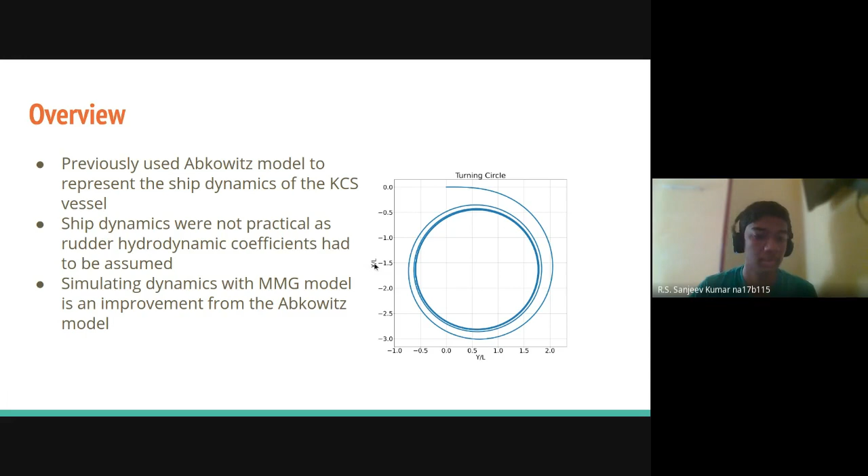So first, for any RL problem, you have the environment, the state, and the action. Here our environment is how we are simulating the ship dynamics. Previously we were using the Abkowitz 3 degree of freedom model for the KCS vessel, and the problem with that was we were missing the rudder hydrodynamic coefficients. So as you can see, this turning circle is not converging at all, so it was not very practical. We discarded this one, and now I'm using the MMG model as the simulation engine for the RL problem. So now I'll talk about how I'm modeling the mathematics using the MMG model.

Okay, so this is the kinematics. These are the global fixed axis, capital X and capital Y. Small x, small y are the body fixed coordinates, and beta is the drift angle. The heading angle is always measured from the positive x-axis in the global fixed frame, and the rudder towards the port side is taken positive. Since the z-axis is downwards, the yaw will be positive clockwise.

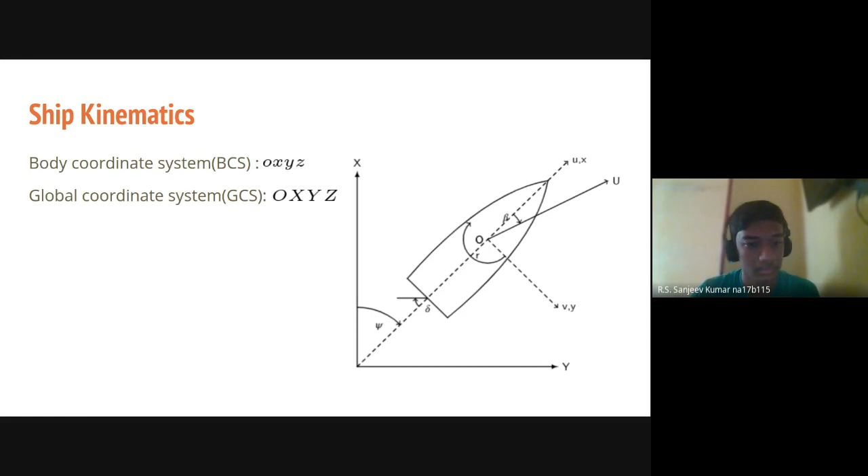Now I'll go through the equations of motion using the MMG model. Here the X, Y, and N are the total forces - this is the total surge force, the sway force, and N is the total yaw moment. These are taken from the midship reference, and in these equations u, v, and r, the velocities are measured from the center of gravity.

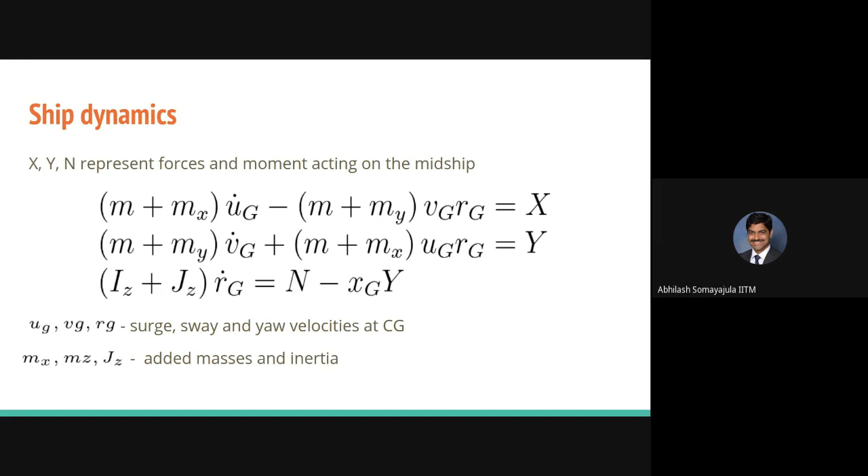Here, X, Y, and N are measured somewhere else. Sir, come again - capital X, capital Y, and capital N, they are measured at a different point. Yeah, they are measured from the midship. From the midship, all right. Here, My, Mx, and Jz are the added masses and inertia.

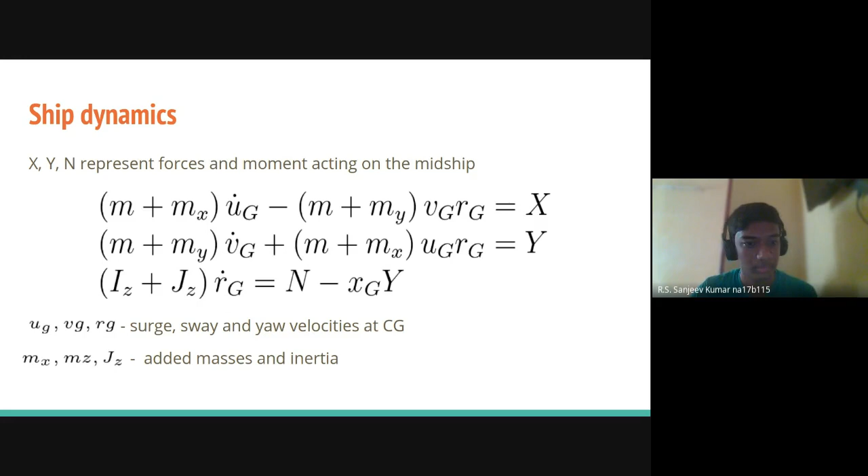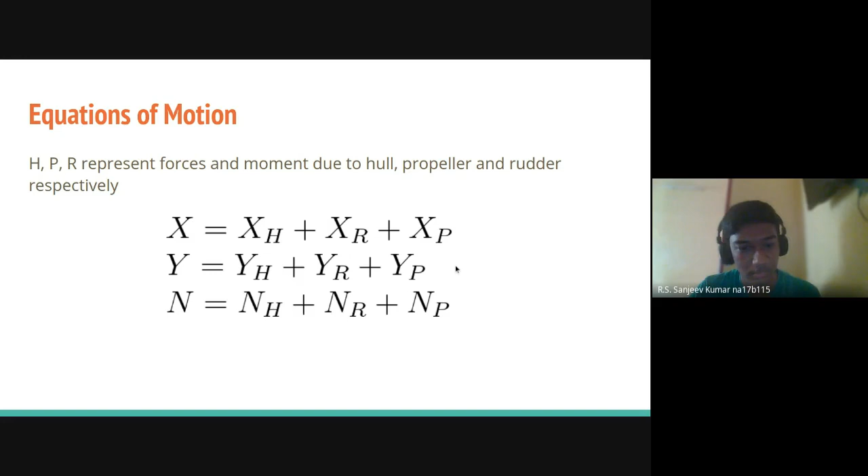This is how the total forces and moment about the midship are calculated. It has the forces due to the hull, the rudder, and the propeller. So this is how the forces due to the hull are modeled in the MMG model. Usually in the Abkowitz model, we'll have hydrodynamic coefficients with respect to the surge and sway velocities, but it is different here in the MMG model - the hydrodynamic coefficients are measured with respect to the drift angle beta and the yaw rate r. So in general, the MMG model captures the non-linearities much more clearly than the Abkowitz model.

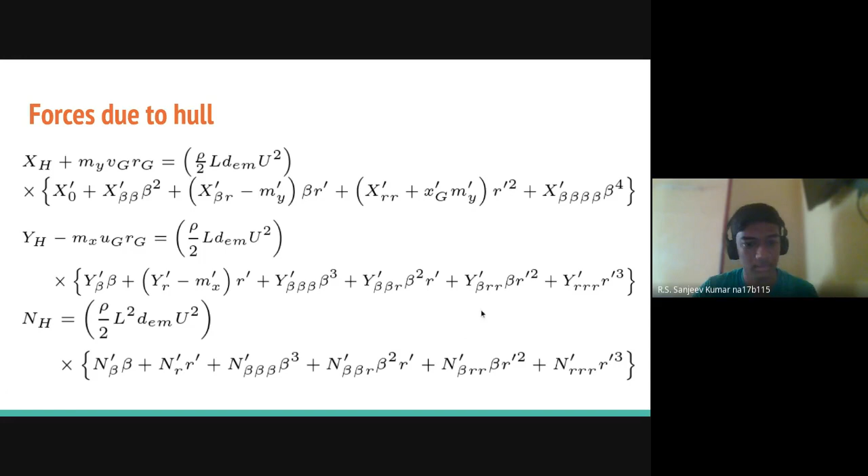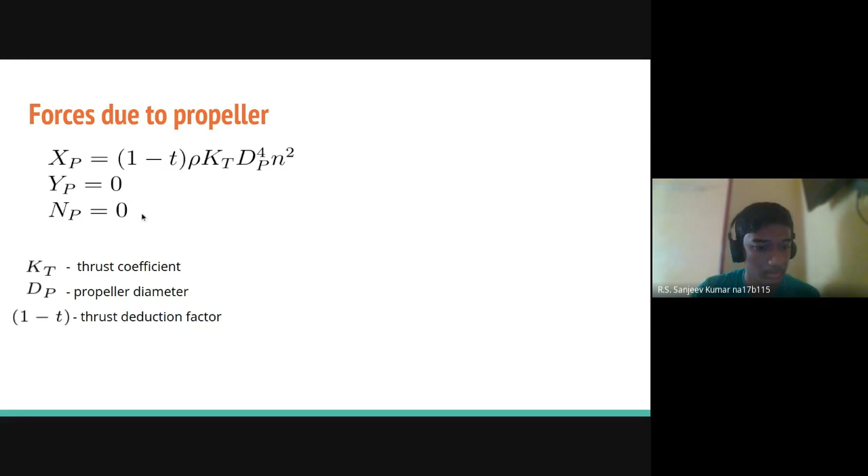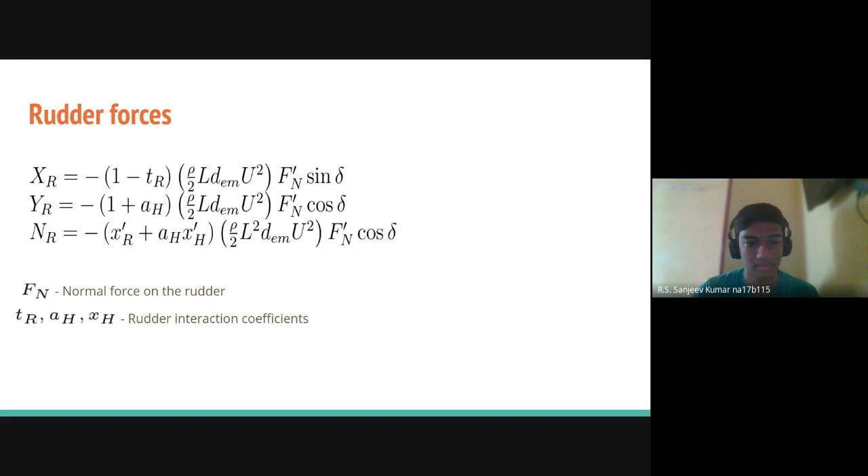Okay, so now I'll talk about how I'm solving the equations of motion that I just talked about. In this problem, the ship dynamics is solved as an initial value problem. I'm discretizing the time into time steps of 0.3 seconds, and the max rudder rate is limited to 5 degrees per second, so the rudder change is not instantaneous. The rudder angle is the action that will be input from the RL agent - that will be the commanded rudder angle, and the actual rudder angle won't change instantaneously. It will change at a maximum rate of 5 degrees per second. The non-dimensional rudder time constant that we are using for the simulation is 0.1.

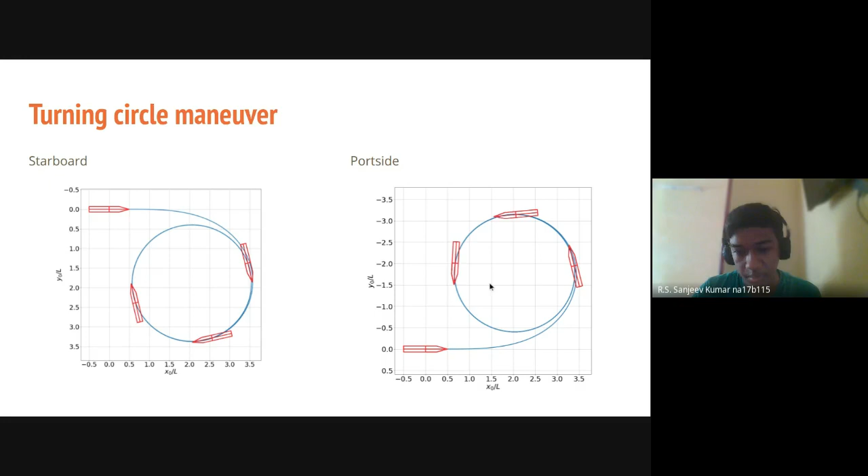So these were the turning circle results for the modeling that we talked about. As you can see in the MMG model, the turning circle won't be the same for a starboard turn and a port side turn. For a starboard turn, the turning circle diameter is 2.97 ship lengths. For port side turn, it is 2.74 ship lengths.

This is the zigzag maneuver, 20-20 zigzag maneuver for the model. It has an overshoot of almost 20 degrees, as you can see here. Any doubts still here?

What's happening with the rudder angle here? So the rudder angle, it's a 20-20 zigzag maneuver. As soon as the heading reaches 20 degrees, the rudder is reversed. And if it reaches minus 20 degrees, the rudder angle is changed to 20 degrees. Since we have a maximum rudder rate, this rudder is not sharp. You can see very smoothly as the turning rate is limited.

There is a limitation on the rudder rate that it cannot be more than 5 degrees per second. So 5 degrees per second, correct? But you also had some time constant in there, isn't it? 0.1, yes sir. How does that figure play a role into this?

This one is a reaction time for the rudder to take place. This is non-dimensional here, so it roughly translates to 0.2 seconds for the 3-meter KCS model. That value was chosen because it was practically sufficient.

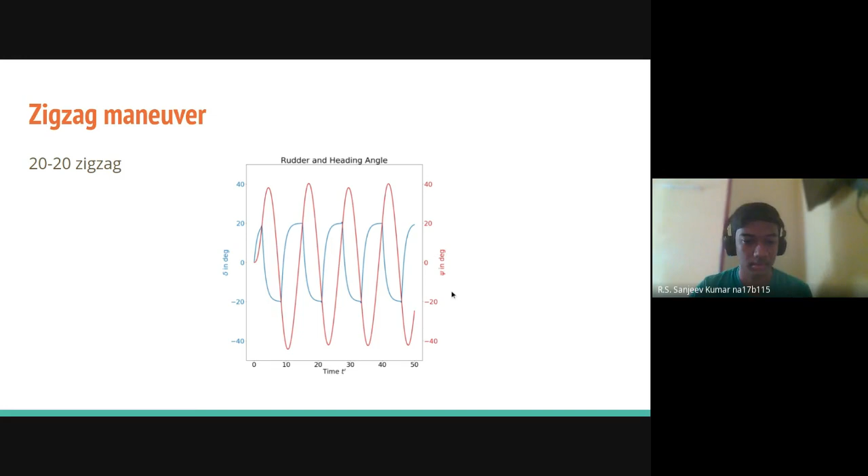Sir, how does it capture the practical case? How does this capture the practical case? Like, won't we put it to 20 degrees continuously at say 5 degrees per second? No, it is put continuously here also.

What he's saying is commanded is immediately shifting. So the moment your angle reaches 20 degrees, your commanded value is immediately changing to minus 20 degrees. But the actual value of the rudder takes time to approach it. Is that making sense?

In a zigzag maneuver, we are basically doing what we want to look at. Once the yaw angle reaches 20 degrees, we shift the rudder back to minus 20 degrees and we hold it there.

So you are changing the commanded rudder angle to minus 20 degrees and holding it there. But the actual rudder doesn't move that fast. I can instantaneously change the rudder from minus 35 to plus 35 right at the next instant. But in reality, the rudder can't respond that fast, isn't it?

So that effect is what he's trying to capture by that lag. So delta here is the rudder angle, right? Delta here represents the actual rudder angle. And delta C here will represent what is his commanded rudder angle.

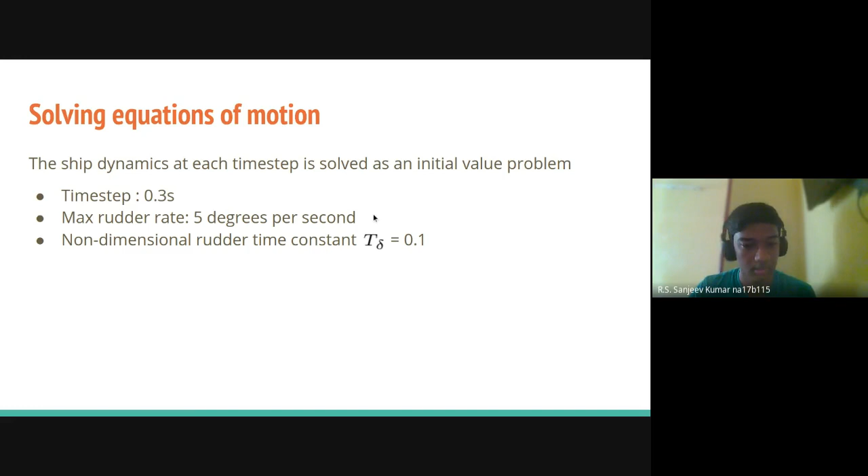Okay, Awanish, you too had a question?

No, I just wanted to say that generally what happens when we apply this command to the rudder. In program, when you say that you go from 0 to 20, it's like instantaneous, it's like a step input. But generally we don't do that. What we do is we use a rate limiter. One second, Awanish, I am not able to hear you very clearly.

I'm saying that in practice, when we do experiments or when we really do it in the field, when the program says you have to go from 0 to 20, it's like a step input. It means that it contains all the frequencies, which generally is not good for our system. We cannot excite our system with all frequencies, infinite frequencies. So generally what we do is for our input, we put rate limiters. So let's say, for example, he has put it here that it has to go slowly to the commanded value, the actual rudder and the command rudder should be like that. In that case, when you put a rate limiter, it will be the same. So for example, I want to go at a certain rate, so my input command will also be at that certain rate. So I won't be messing up by exciting my system with infinite frequency.

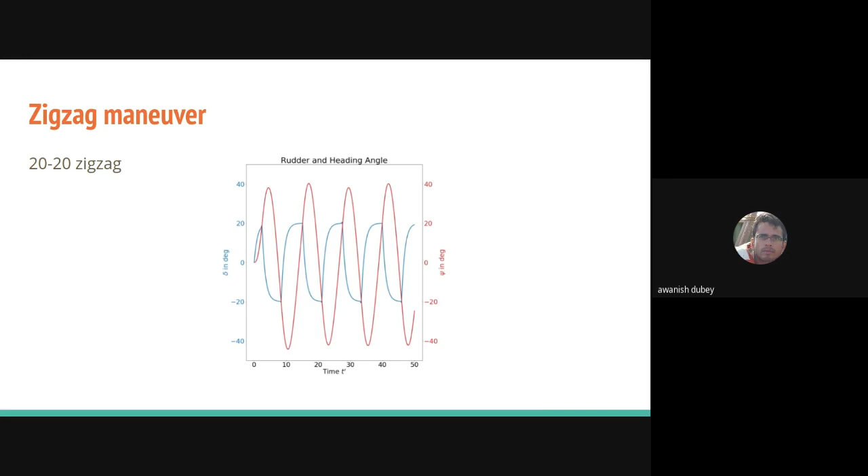So in practice we put the second order transfer function which takes our command input from 0 to desired value at a particular rate. Correct. So if you put a second order system, your point is that you can actually control the rate as well as the actual displacement from moving very fast.

Yes, correct. And he is using only a first order system, so therefore he has to take a maximum value of it so as to not make it exceed the 5 degrees. But if you had a second order system, you could incorporate that also into the dynamics, is what you're saying. Am I right? Yes. Okay, all right.

Okay, Sanjeev, so that's a point well noted. What his idea is, is that if you take a second order system, then what you are trying to limit, your rudder rate, that also can be incorporated to be slow enough. Otherwise, now suddenly your rudder rate is maximum and you can't jump to 5 degrees per second rudder rate suddenly.

So in your approach, your delta is continuous, but your delta dot may not be differentiable. But if you use a second order system between your commanded rudder and your actual rudder, then that will also be differentiable in nature. And that's what is his point. Oh, okay.

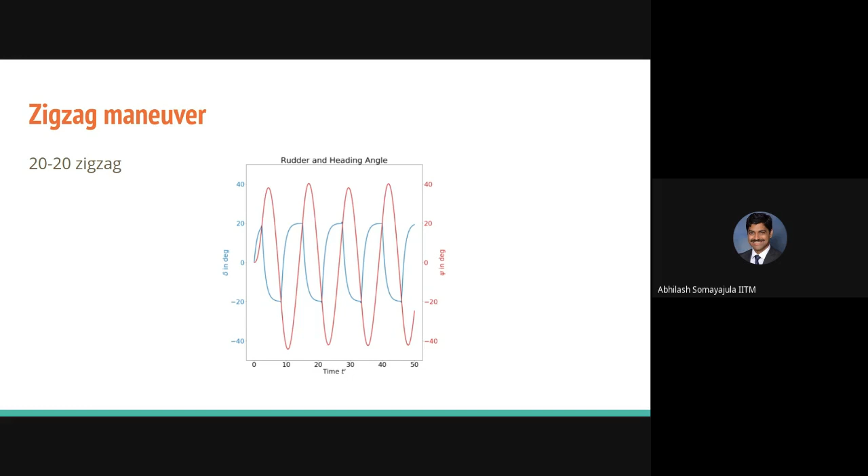So now I'll talk about the reinforcement learning setup for this problem. So I'll talk in brief about Q-learning. Q-learning is a very basic RL algorithm, so it is not very practical because it works only with a discrete action space and state space. And so it has to maintain a Q table containing the state action values. As the number of actions and states increases, notice that this becomes impossible to maintain.

So action state pairs can be represented as Q of S, A. And at a certain state S, there can be n actions possible, and the action that is chosen corresponds to the maximum Q value. So this Q value is the quality value. The optimal policy is chosen by the agent for whichever action the Q value is highest. So because maintaining this Q table becomes impossible, that's why we use a neural network as a function approximator.

So that is called deep Q learning. So what is the Q value? That is called a quality value. So at a certain state, since the action space is discrete, there can be n actions, and for each action there is a value called the Q value. So what does that Q value represent? It represents the quality value. So if an action has a higher Q value, it will be closer to the optimum policy to be chosen at that time stage.

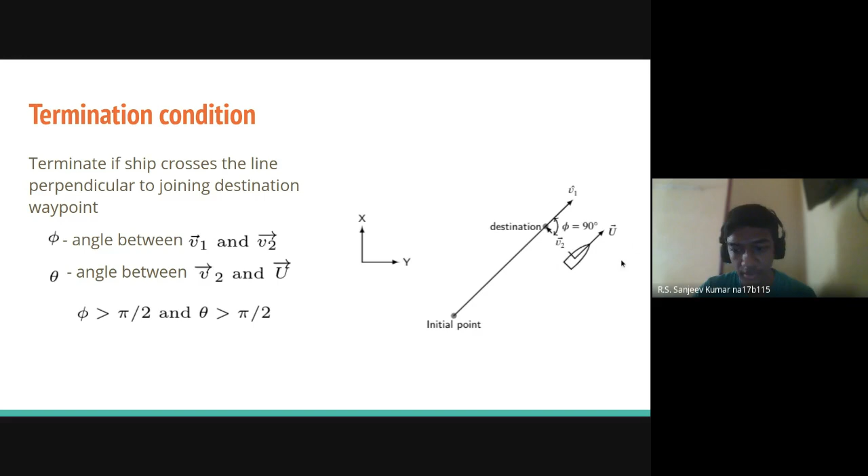So if in this particular position the velocity vector were more inward towards V1, then the episode will not be terminated. Let's say if it is on the perpendicular line and oriented towards the destination point, then this theta angle will be close to 0, so it can still reach the destination point, so it won't be terminated. But if that angle was 180 degrees and it was pointed right away from the destination, then it is terminated, since it is not likely to reach the destination, so we terminate it. Okay.

So now we'll talk about the epsilon greedy algorithm. Every RL problem has a trade-off between exploration and exploitation. So what is exploration in an RL problem? To learn all the possible actions from a possible state, it has to explore.

So when it reaches, when it learns to gain the maximum rewards, it tries to exploit the situation by getting maximum rewards. That's why we use this epsilon greedy algorithm. So with the probability of epsilon, a random action is taken, and with the probability of 1 minus epsilon, the optimal action output by the agent is taken.

So for this problem, let's say I'm training for 10,000 episodes. At the start of the training process, the action taken will be totally random, so epsilon is 1 at the start, and it linearly decays throughout the training episodes, such that at the end of the training process, it learns to take actions on its own.

So what is our value of epsilon as more episodes are trained, tapering down? Right now I'm using epsilon to be linearly decaying. At the start it is 1, so the action taken will be completely random. Let's say I'm training for 20,000 episodes, and around 10,000 episodes it becomes 0.5. So at that stage, it has a probability of 0.5 to take a random action, and with probability 0.5, it takes the optimal action from the agent.

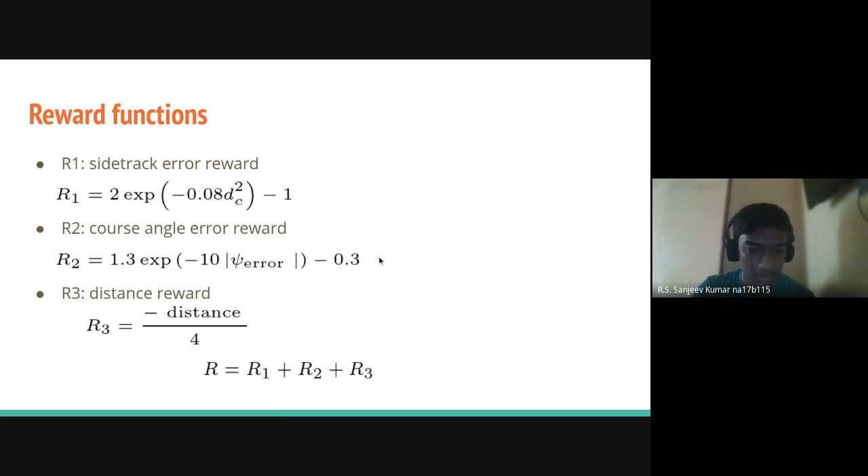Sanjeev, in the previous slide, did you also try with ReLU activation first? I also tried with ReLU activation in the intermediate layers, that also did not give good results. And how long does it take to train with this usually? 30,000 episodes, it takes 5 or 6 hours to train. But sometimes, in case most of the episodes are reaching the destination, it can end early, terminates early, then it can finish short.

So this is how I'm choosing the training points. The points are chosen randomly from a certain radius, 8 to 28 ship lengths, and the ship always starts from the origin with a certain speed of 1, with a heading of 90 degrees towards the positive y-axis.

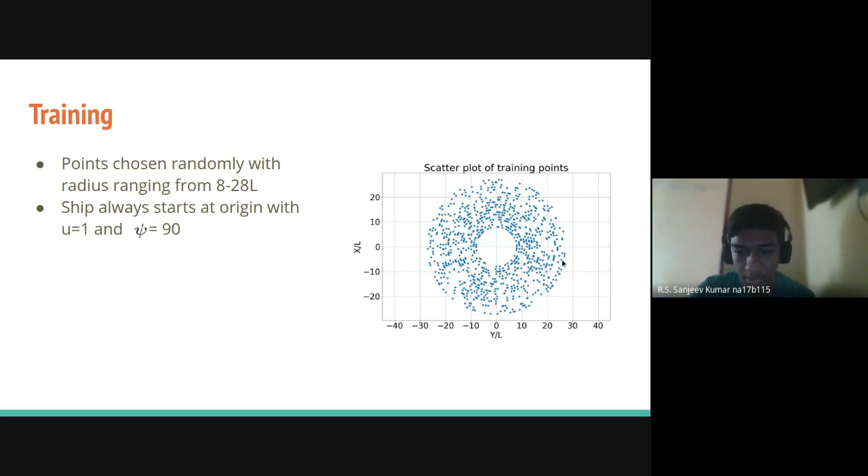These were the results after the model was trained, for waypoint tracking. The ship starts at origin with a surge speed of 1 and a heading angle of 90 degrees. You can see it reaches all the destination points in all the quadrants.

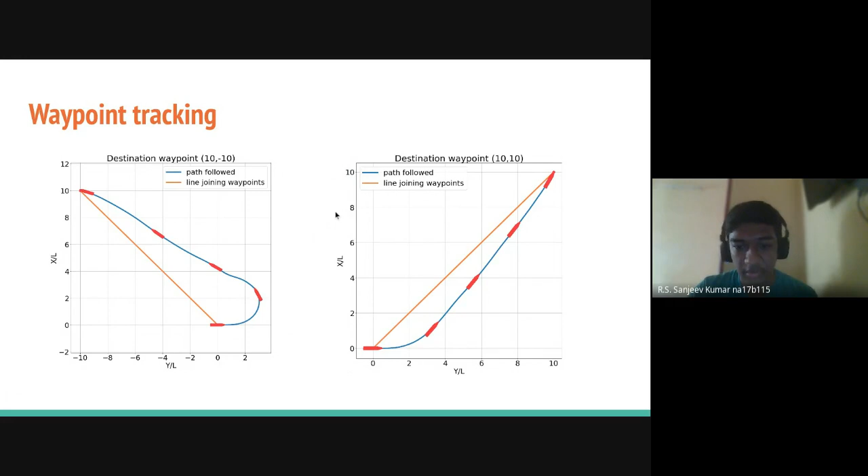Correct. I'd be curious to find out if that is closer to the ellipse or further away from it. Does it lead to more variation, or does it come closer? I'll try it out. Yeah, you can try it out at a later point.

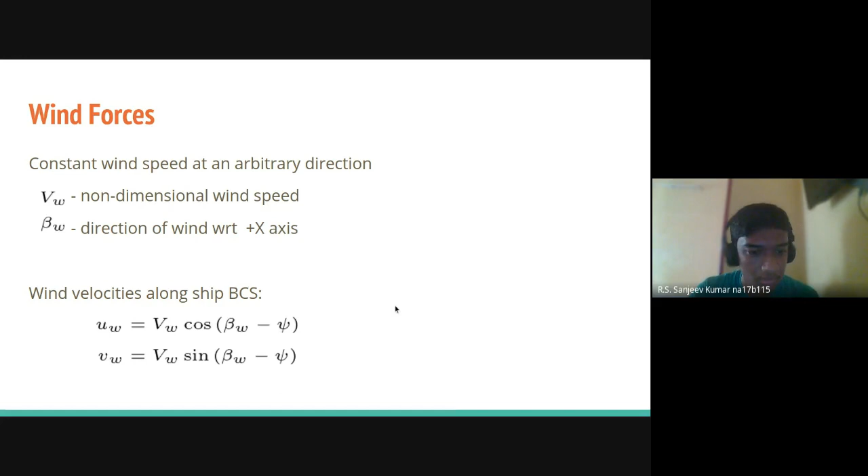So first we'll split the wind speed along the ship axis. This will be the relative wind speed with respect to the ship frame. This will be the relative wind angle, calculated as tan inverse of V relative by U relative. So these will be the non-dimensional wind forces. Note that all these forces are non-dimensional. So the only change in the dynamics is that each X, Y, and N will have a component from the wind force. Any doubt here?

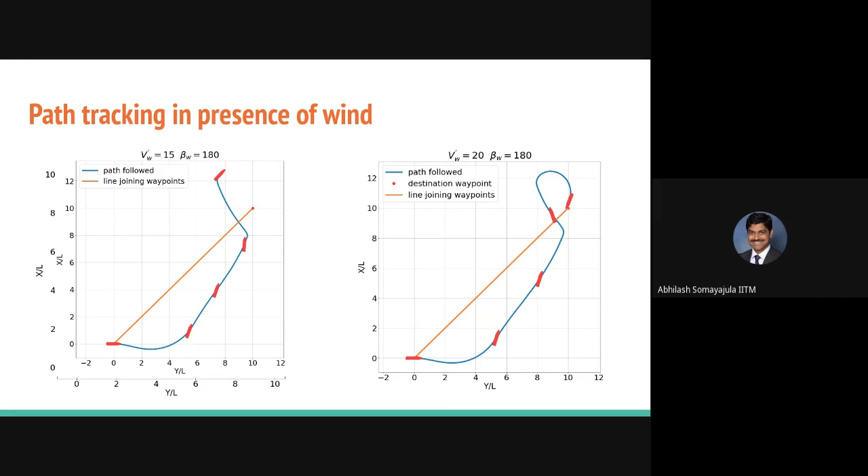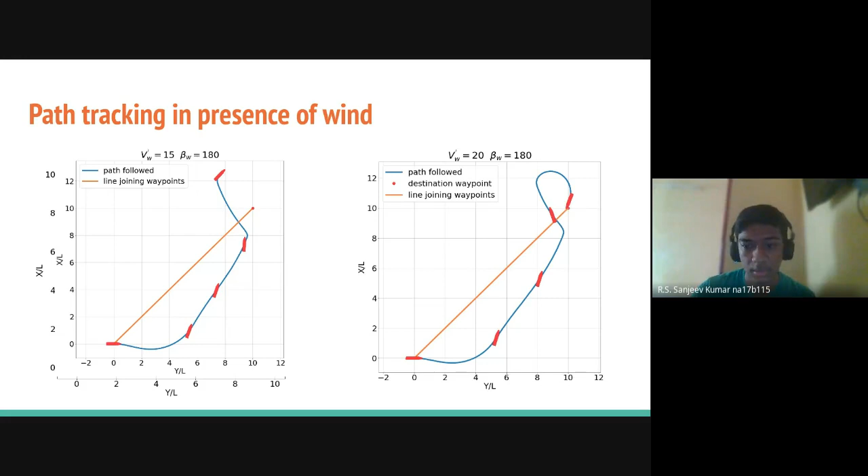And if I increase the wind speed above 6 or 7, it won't be able to track this properly. It will be thrown off.

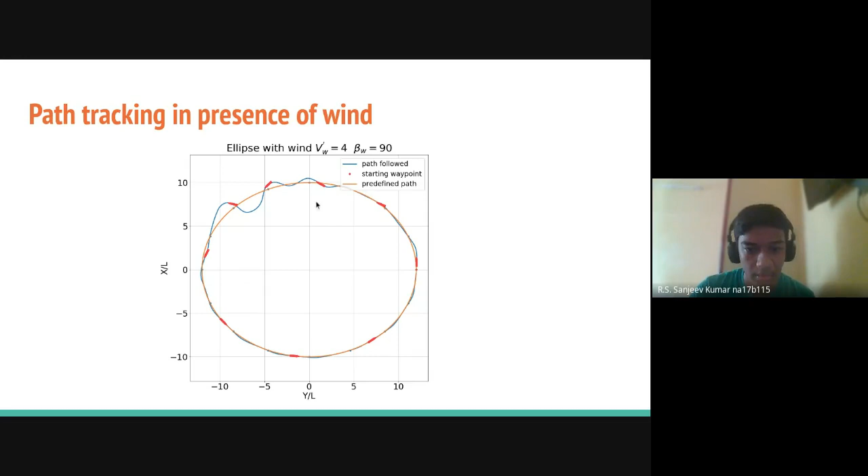So now tracking an elliptical path with presence of wind again. Here too the wind acts from left to right. And here clearly the path shows that the top one has a deviation. So at this point, opposing.

No, I kind of feel, this is my feeling, that whenever the direction of the heading and the direction of the wind are either 180 degrees apart, there you will see this problem come up. It might be a destabilizing moment.

Yeah, okay. We have to look at something called, okay Sanjeev, remind me next time, we'll look at something called a Munk moment, which is generally a destabilizing moment, or it can be a stabilizing moment depending on the geometry of the ship. It's purely coming from a hydrodynamic perspective, but your wind might be causing it to set in this instability, and whether that instability is getting magnified due to the Munk moment is what I'm curious to find out. I may be wrong here, but remind me to take a look at that, okay? Okay, sir.

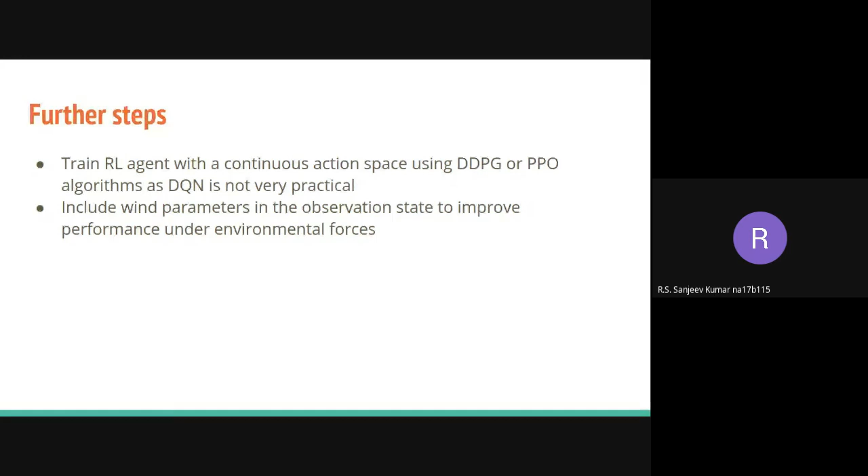Yeah, those were the results. So this model could be improved by training with the continuous action space, or as Anish suggested, we can use a second order rudder change. And so far these results that we saw, while training the model, the wind parameters were not included, so the agent does not know how to react to or act in the presence of wind speed, and these are purely reactionary. So actually, if we train the model by including the wind speed as one of the observation states, it should be able to perform better under wind forces.

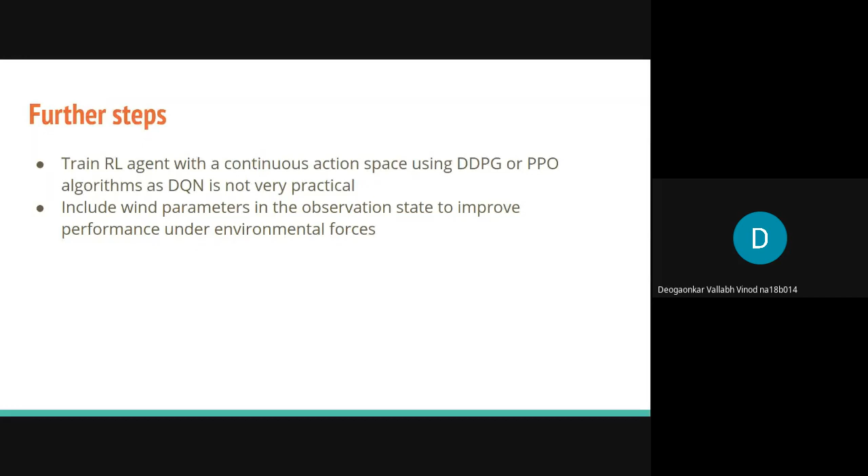I just wanted to ask, when it is tracking that ellipse, it only wants to reach those points, right? One after the other. It doesn't actually want to track the ellipse. If we had put those points a little farther away, it wouldn't have gone along the ellipse, right? Yeah, so if I put the points further away, it wouldn't have closely followed the ellipse. It would just try to reach the next point. So yeah, that's right.

So it's not in essence really a trajectory following. It is actually a waypoint follow. As long as the waypoints complete the ellipse, it tries to reach one waypoint to the other. But it really doesn't look at the trajectory as a whole and try to make sure that it follows that. That's not the goal of this work.

The problem then becomes slightly different, Vallabh. What happens there is, if you have to have trajectory tracking, it has to be independent of the path. You have to come up with a methodology such that it's independent of the path. Waypoint is a very simple way to make it independent of the path. Are you able to understand what I'm trying to get at?

Yes, sir. If we put the points closer, more points along the ellipse, then it would track the ellipse better. Actually, we cannot put too many points as well. That would be a problem, because if it is very close, it won't reach the point properly, and the oscillations keep building up. I've tried that, so that is also not good.

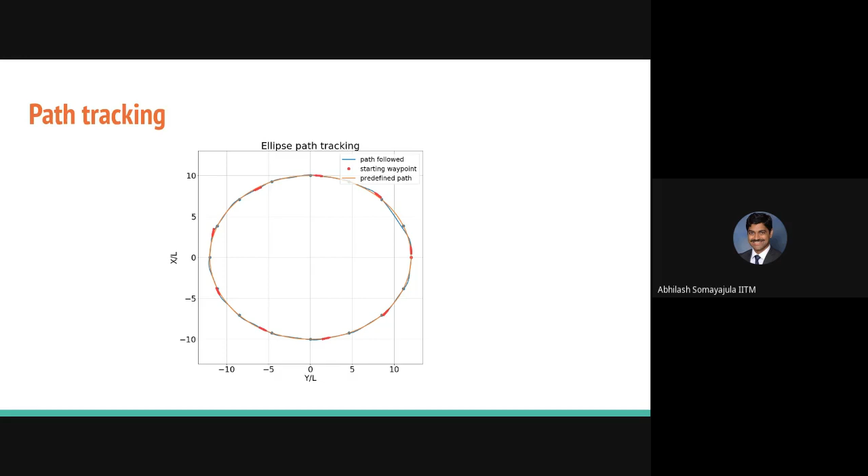Aradhya, Mansi. Yes, sir. Hi, am I audible? Yeah.

I think I'm still taking it in, but it was a very fruitful discussion. There were a lot of points where I was missing out on what could be a possible question, or if things weren't clear to me. Overall, in the last 1.5 hours, I learned a lot about how RL is helping out, and how first and second order systems have different things coming into play, even in terms of selecting what kind of RL model you want to run. So overall a very good presentation.

Not a lot of suggestions from my end, but during the presentation I was actually looking for the legends a lot of times when reading graphs, because I didn't have a full understanding of what you're trying to do. So maybe elaborating more on graphs would help, because when I'm reading I want to understand fully what I'm seeing on the screen. That's a very minor suggestion from my end. Yeah, point taken. Yeah, thanks.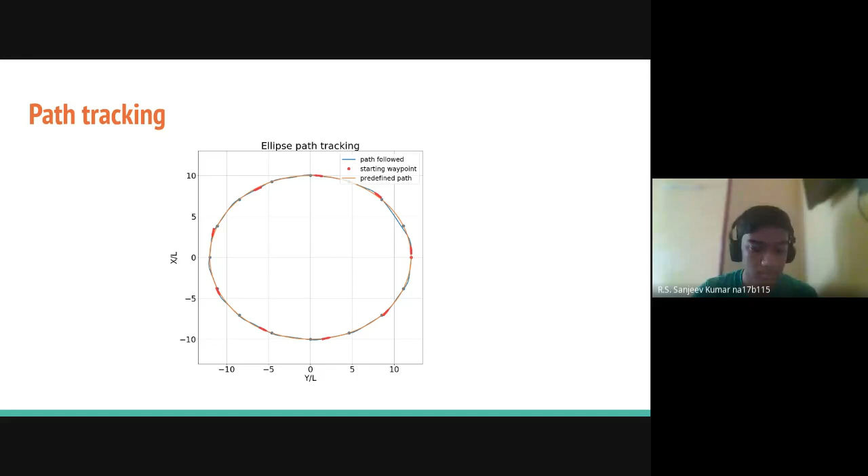Aradhya: I found the presentation interesting, but I was reading sideways about your activation function. You said you tried ReLU and other activation functions, and finally decided to go with tanh. But since we're seeing different anomalies here, I was thinking whether you can give a try to maxout units. Somehow we can try to learn our own activation function in this case.

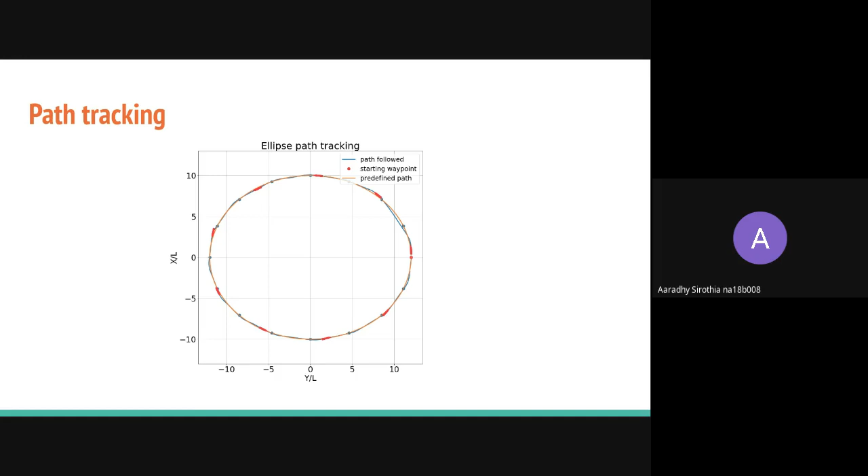Is it possible to learn different activation functions? Yeah, we can use maxout units, right? Sorry, come again, maxout what? Maxout network for learning different activation functions, for trying out different activation functions. Okay, can you describe it a little bit more? I'm not familiar with what you're talking about, maybe enlighten me a little bit.

It's like an activation function. It says the activation function is a max of the input. I was also reading that in a paper itself, so max of the inputs. Right now I cannot comment entirely on that. I was thinking this is some other functionality. Okay, you just want to take the maximum of the inputs which are coming in and pass that down to the next level.

It would be like... okay, is that what you mean by maxout? That you take the maximum value of all the inputs coming in, and that becomes the output of each node? Yeah, sort of.

Okay, any particular reason it tends to work? It tends to work well with convolutional networks, whenever you're trying to regularize it, trying to control the stuff such that it gives you the output you desire more. So I'm not very sure whether it will work entirely with a reinforcement learning network or problem, but yeah, that's what I'm reading sideways.

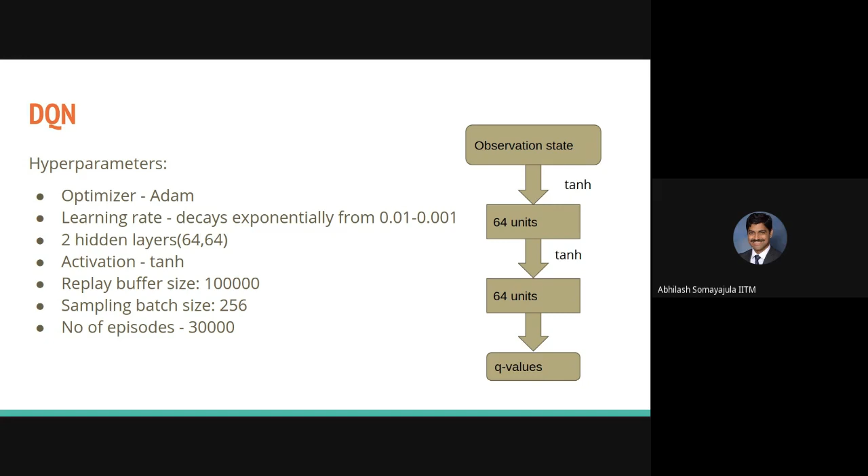Also, apart from that, one thing I didn't understand is how you're back propagating. Since, for example, if you're talking about rewards, if you go left, suppose you give a reward of 1, if you go right, you give a reward of -1, since these values are discrete, how are you back propagating? Maybe a lame question, I don't know. Yeah, so this is the loss function for DQN, and from here, using this loss function, back propagation is done. Right now the batch size is 256, so after each episode, one update is done. I'll explain how the updates are done: take multiple samples from the replay buffer for updating.

No, I think what he's asking is, is your reward discrete? No, it's continuous, it showed the reward, it's not discrete. Correct, so since the reward is not discrete, it really doesn't conform... your question is kind of slightly off the mark there, because the reward is actually continuous. So the loss function is continuous and differentiable, and you can actually propagate the gradients back. Did that answer your question?

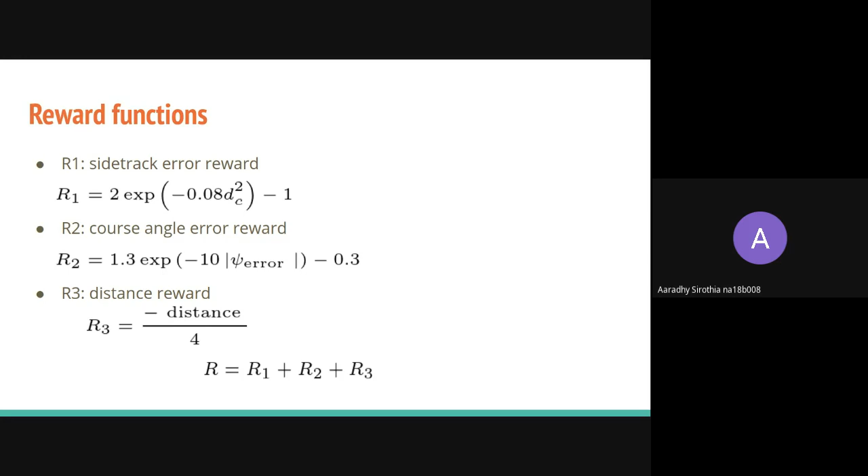Can you go to the rewards first, the rewards function? Oh okay. Yeah, these two rewards only are plotted here, bounded to 1. Only the action is discrete, the reward is continuous, the state is also continuous. Only the actions that you can take are discrete.

Should I take plus 35? Should I take minus 35? Or should I take 0? Those are the only 3 discrete actions that you can choose from. But the expected value of the reward which you will get, that's not a discrete value. Okay.

Yes, Awanish? Hi, quite interesting work, ma'am, very interesting. So I would be interested in looking at your actions plot. If you can show me your actions plot, which goes minus 35, 0, plus 35. And let's say, for example, if someone applied the same action to the dynamics of the model, the MMG model, and see if it does the same thing.

I didn't follow that. Can you repeat again? It's quite interesting to see that it follows that ellipse or the circle.

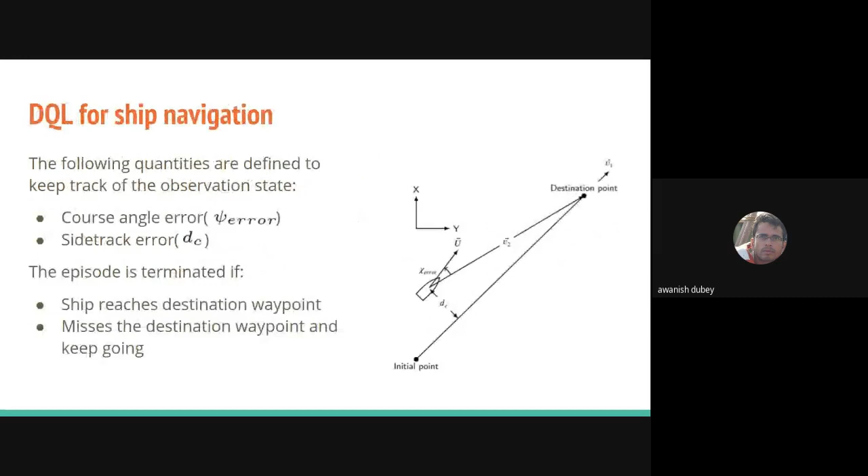So in the background, the mathematics runs the nonlinear dynamics, and then your other action will be based on your machine learning algorithm, and then you apply it to the nonlinear system. So at each time step, these observation states are calculated and input to the agent, and it outputs an action space, a command rudder angle among these 3 values. That's it, and the dynamics is what is running the system.

And these observation state values that you're looking at, they are actually coming from your MMG model. So you calculate the state value.

So I think it looks quite energy efficient as such. Right now it's 3 points, but let's say if you are doing some path following on the track, then it will always be showing 0, so no rudder action, right? Yeah, correct, so if you are actually on the path, it's quite energy efficient. You think it will be more energy efficient? Yes.

So okay, I didn't follow that, why would it be more energy efficient? So that there won't be more rudder action involved. For example, let's say I'm deviated a little bit, 1 degree, 2 degrees. Yeah, if you're only deviated by 1 or 2 degrees, it will not take a rudder action. Yes, so it will be like more or less not doing anything, and it will be more energy efficient, that's my point.

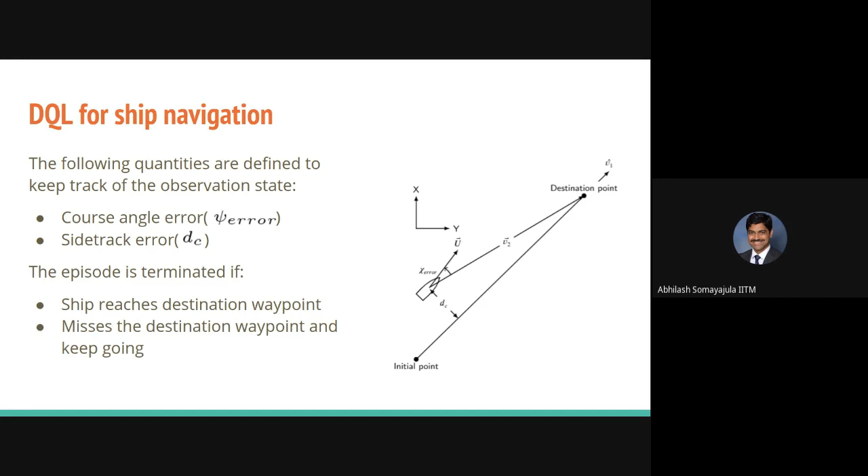I actually have a feeling that might not be so true in the ellipse case with the wind. Can you go to that, Sanjeev? Clearly in that place, this technique has failed, right? It could have maintained course much better, probably if it were heading straight without having to worry about the rudder action.

But then, in all fairness, it's probably the sway, the yaw force due to the wind, the yaw moment due to the wind, which is pushing it on this side and that side, and it's trying to compensate and get back. We have to see at this case though.

Sanjeev, I'm very excited about this. There might be a potential instability that we are dealing with here. See, that's what I'm trying to get at. Here it is trying to compensate, but the wind is too strong. Even if it wanted to maintain the course, it is unable to maintain the course, right?

Yeah, but it's sort of trying to reach the course, right? It started deviating, let's say at 5 and 10. And then at that point of time, let's say it is exactly, so this side it's left to right, so it means it will be 180 degrees off the way. Oh correct, at the top it is 180 degrees, and that's what is causing the problem.

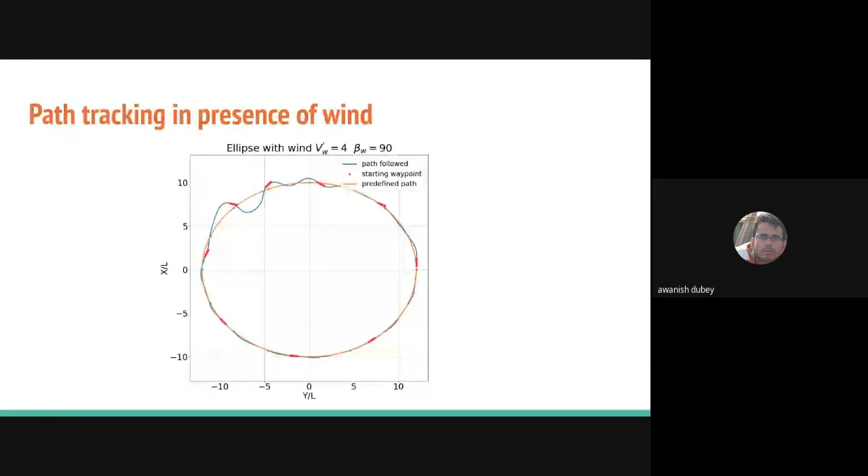The question is whether it is flipping between a large value, if there is a switching type of thing which is happening. But I don't think that is happening, because I think Rohit had taken care of that to my knowledge. Okay, maybe Sanjeev has to check up on it once.

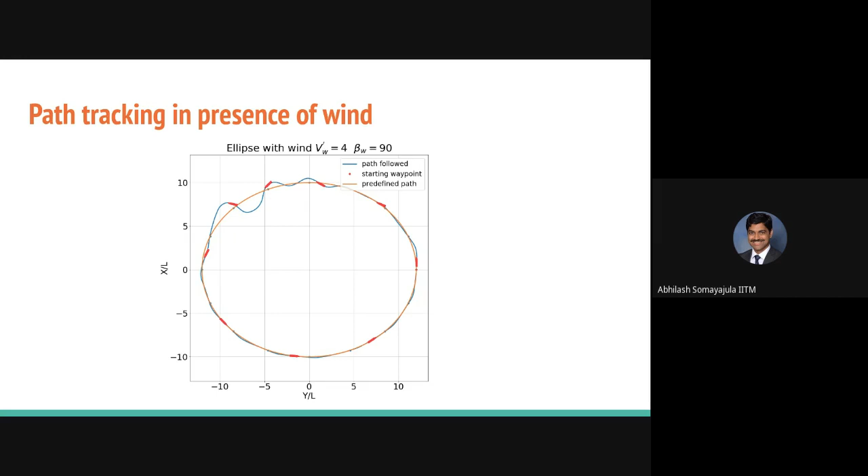What is happening to the course angle error? Is that what is destabilizing it? Is it flipping between minus 180 and 180 or some particular value? Because 180 and minus 180 represent the same angle. But let's say that I am at 180 minus 5 degrees and 180 plus 5 degrees, then the course angle error, is it observing a jump? Is it 175 degrees, and the next moment it is becoming minus 175 degrees? Sir, I don't think that should affect it, because the reward function is symmetric.

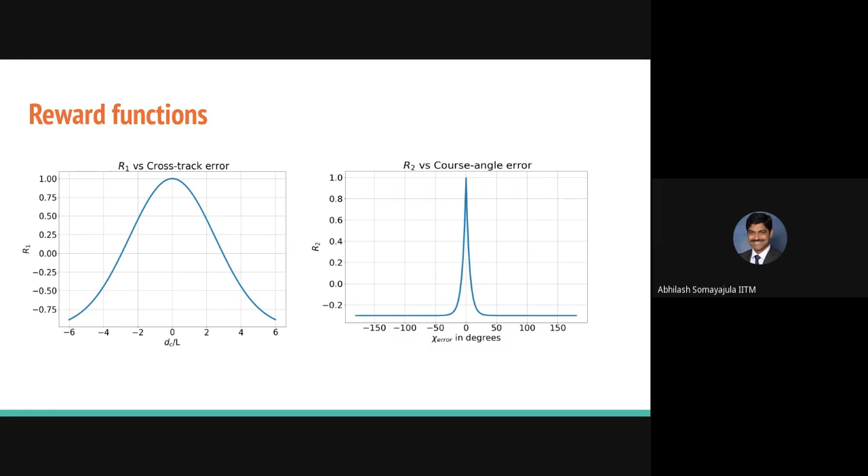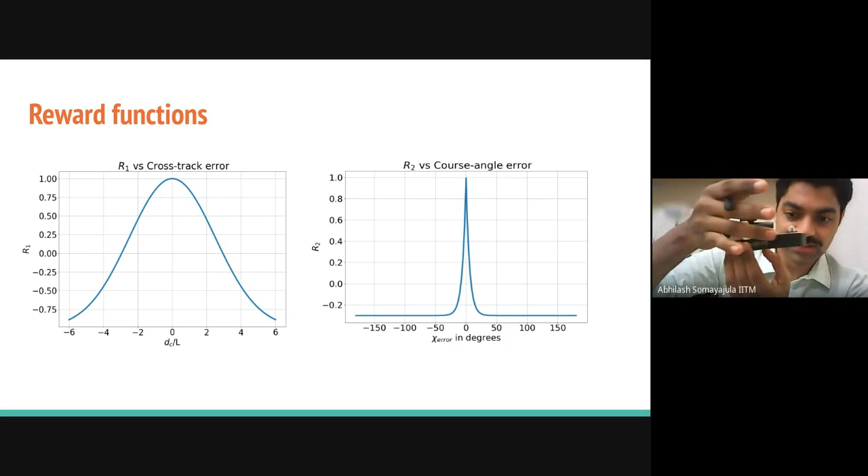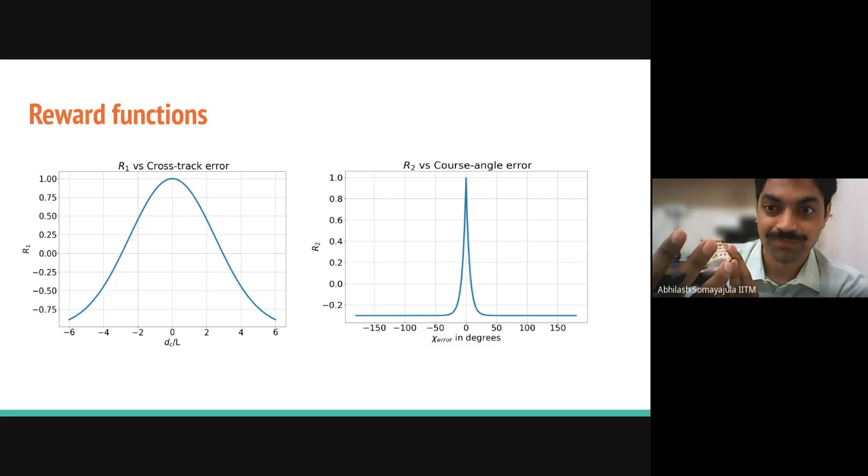The reward function is symmetric. No, that will affect things, because you're trying to compensate in one direction, and suddenly the next moment you're trying to compensate in the other direction. Let's say the ship is swaying this way, then it has to compensate to come back, correct? Similarly, if it's yawing this way, it's trying to come back onto the straight track. But if your course angle error is observing a flip, then what's happening? It's trying to do this, but when it's like this, it's trying to bring it back like this. You'll see a big difference in the scenario, dictated by whether your course angle error is observing a switch.

That might explain this. Yes sir, we should plot the course angle error over time for that trajectory and verify what is happening - whether you're seeing a flip in the angle, whether it's flipping from -180 to 180 when that jump is happening. But to my knowledge, Rohit fixed it. Let's check upon it one more time. Yes sir.

All right, any other questions? Sir, in this it was not trained to take into account wind, right? No, yeah, in the training process it was not taking into account the wind. So in case of winds, it is purely based on its reaction to the current state. So we should try including the wind force, the wind speed and direction as one of the parameters. That should definitely improve the performance against wind forces.

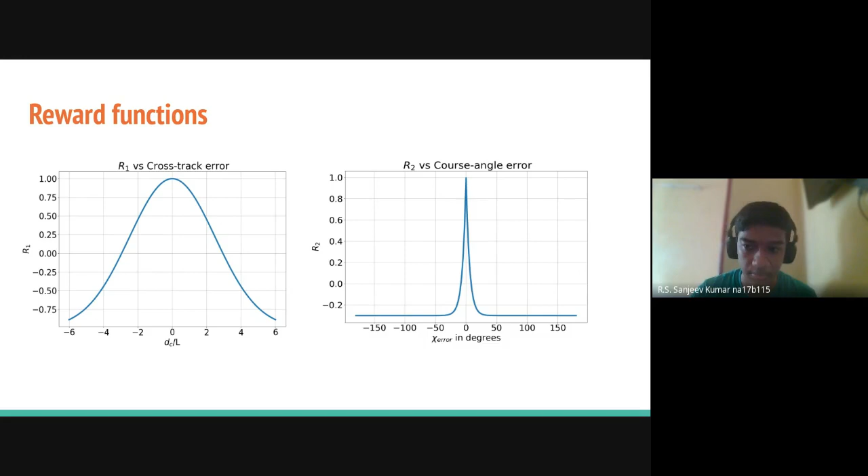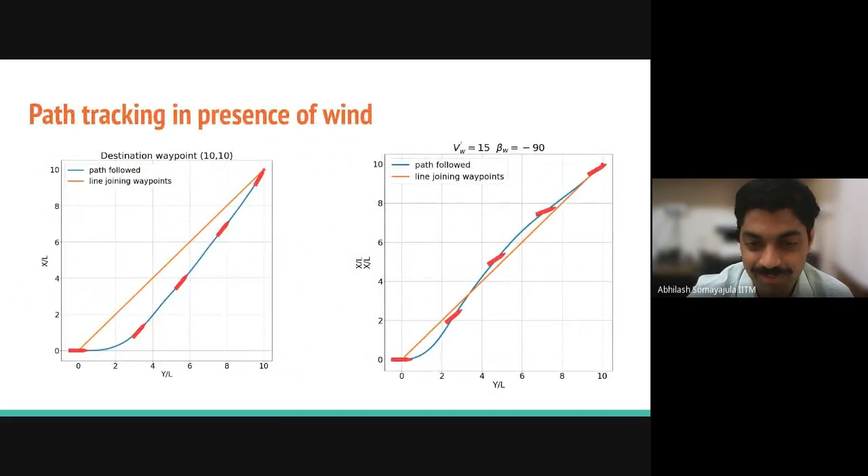So there will be more observations? No, I disagree that we should put the wind as an observation into it. Yeah, if you really are able to measure it, then yes. But for most of our applications, we won't be able to measure it. It could learn that wind is there because of its states. Yeah, that would be a feed-forward control if we could measure wind and give it to it. Correct, but unfortunately, I don't...

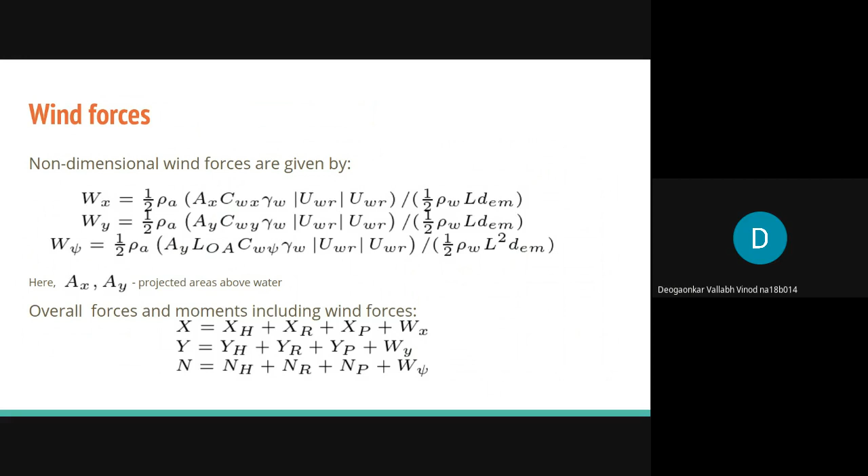I'm not sure, but during its learning, if wind is there, from what its trajectory is going on, it might learn that wind is there and it is supposed to react in some general way when wind is there. Yes, that's what I mean - it will react in a feed-forward way, meaning even before the wind actually affects your trajectory, it takes a proactive measure to account for the wind. Yeah, right? If you give wind as an input to it, it should be able to do that. That's the primary thought process. Am I right? Yes, and I see that that's definitely a possibility.

And that might have prevented that from happening? Question mark. Sir, why can't wind be added to the observation state? Like we can train it on... The reason why I don't... Yeah, you can train it, it will be a good simulated study. But for me to make this an experiment will be much harder, because then I'll have to generate wind in a reliable manner for those experiments, which I currently don't have the facility for, isn't it?

Yes, but in an open environment, it is possible, right? Wind can flow from any direction. So it can flow from any direction, correct? But you need to be able to account for these winds which are very strong.

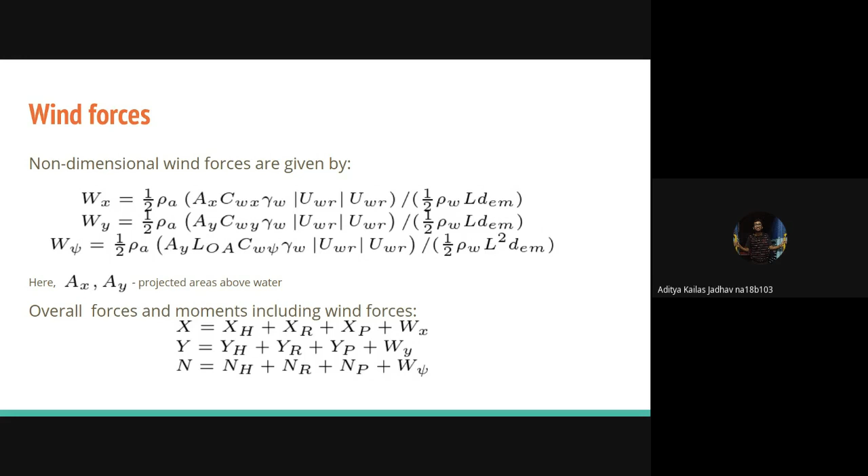So which means when I'm simulating or experimenting with reinforcement learning, my model should be exposed to the data - I have to provide that experience to the model. And I can't guarantee that in the lake, no? I can't guarantee there will be a wind speed of so-and-so on so-and-so day or time when I'm testing. Only if I give it the information can it learn - it can't learn what I don't provide. Yes, isn't it? But if I had a wave basin with a proper wind facility where I could generate wind in multiple directions, this would be a very lucrative process to study. Yes sir, so we need more facilities. Always the case.

All right, any other thoughts?